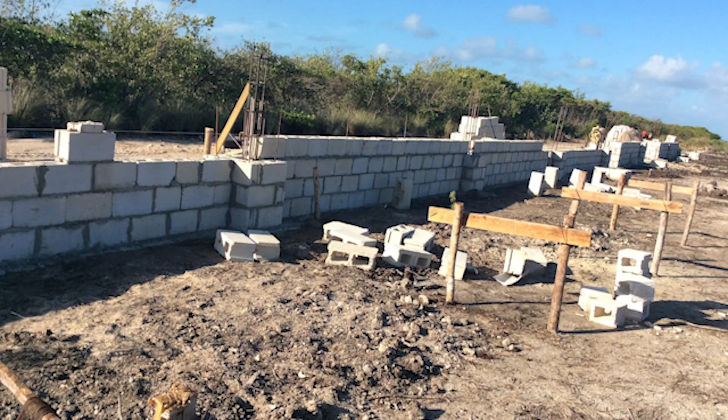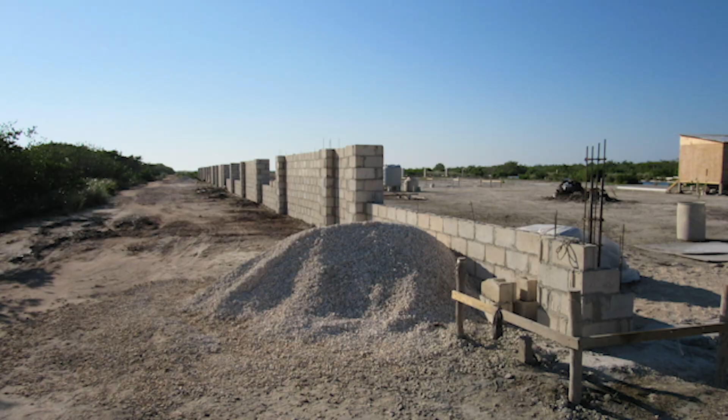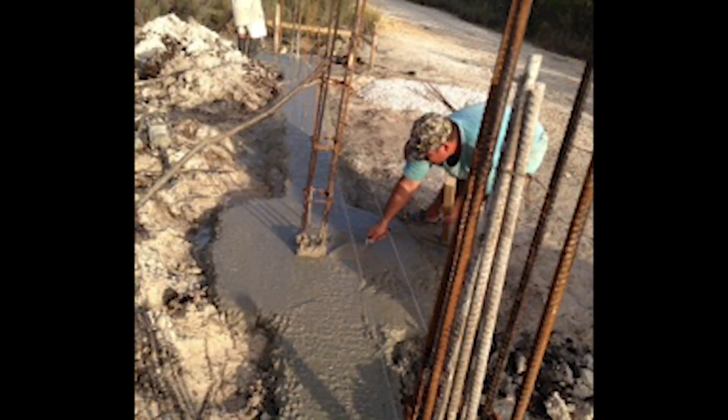Phase one. We kind of divided it up into phases. Phase one was, let's go ahead and find a piece of property, secure that piece of property, put a fence around it, really demark it from the rest of the community so it was secure and everybody was aware. We got it surveyed, planted stakes in the ground, and then immediately worked to get a contractor so we could start the fence and really start to secure the property.

We chose Caye Caulker, which is also a very touristy island, but at a much smaller scale. There's roughly 1,500 people that live on Caye Caulker, so there's not a lot of natives and families and housing on the island. So you get a fair mix of regular residents and inhabitants and a fair amount of tourists. It seemed to fit what we were looking for.

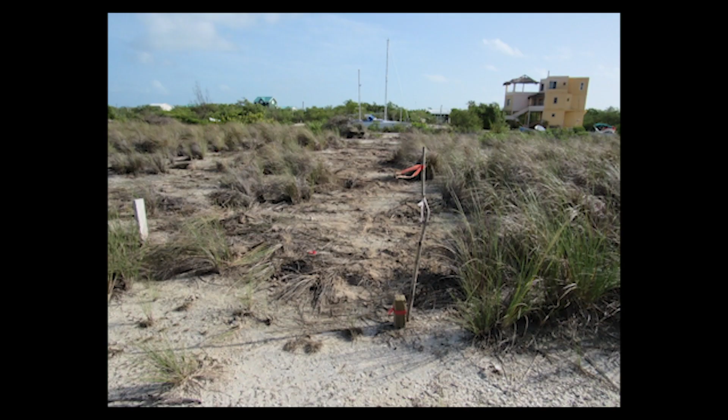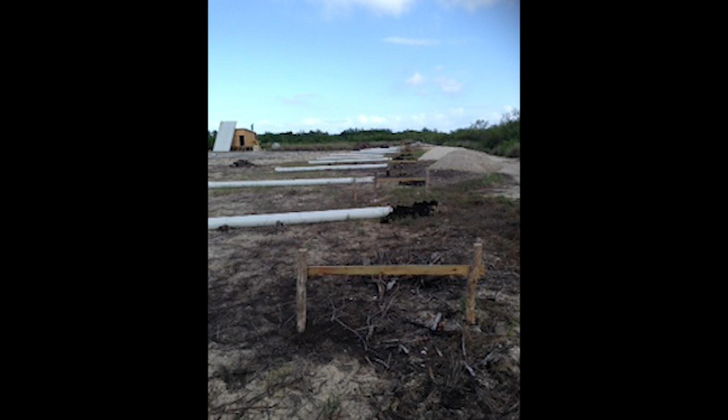Of course, the first step in the journey was to actually purchase a piece of land. But as you do it internationally, that opens up a whole other can of worms and process we were not intimately familiar with. At the end, it very much resonated with what has to happen in the US. Just imagine 10 times longer.

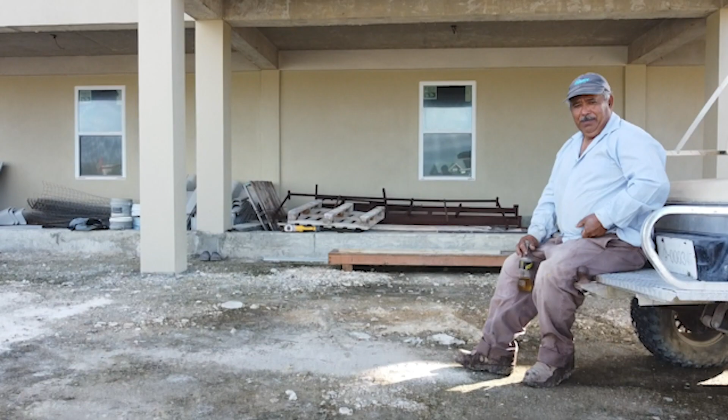So I got with our realtor. She was very instrumental in guiding us through the process. She introduced me to a builder who was local on the island. We went through, saw a bunch of his work. He toured me through the island of construction projects he had done, and that really put me at ease that he would be a good contractor.

After that, we had to figure out what we wanted to build. So we did a little bit of research online and tried to figure out what would blend in with Belizean style, a little bit of American style, but really give us a solid house that would weather well.

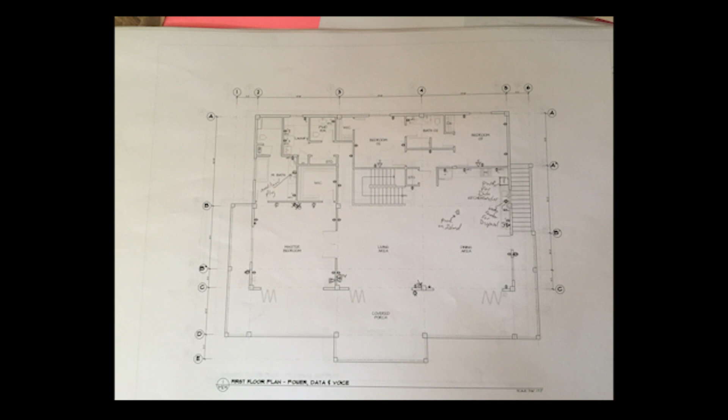So we picked out a design, and then we started to investigate what it takes to build in Belize. I went back to my realtor and my builder and said, hey, we've got a design of what we want for the house. Now I need to get an architect.

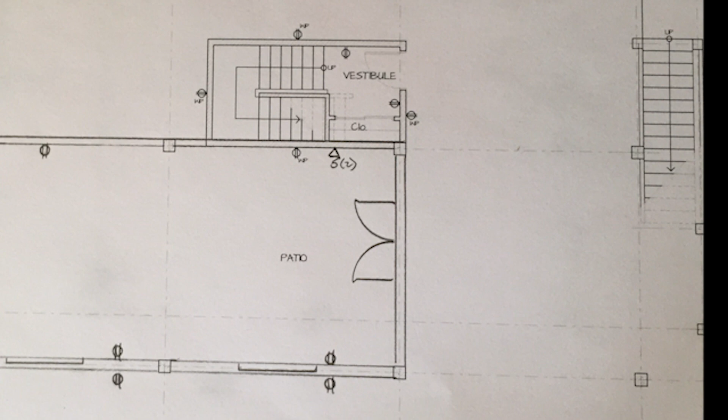So we made contact with the architect. I sent him the designs that we had, and he said, yep, absolutely, I can do the designs, I can do your drawings. My firm will pass it over to an engineering firm. You'll get the engineering stamp on it, you'll get all the approvals, and we'll take care of all the permitting process. Phase two.

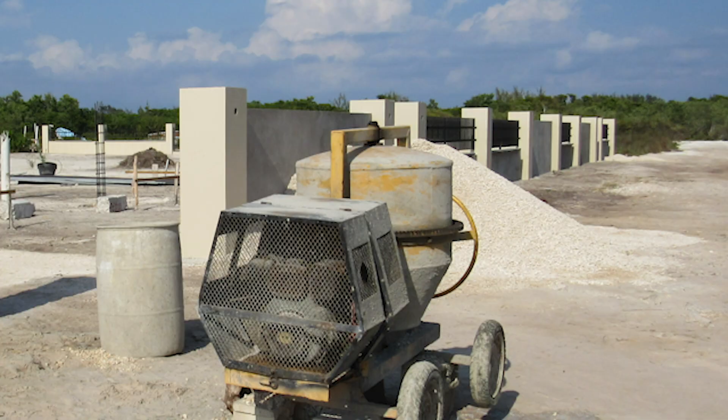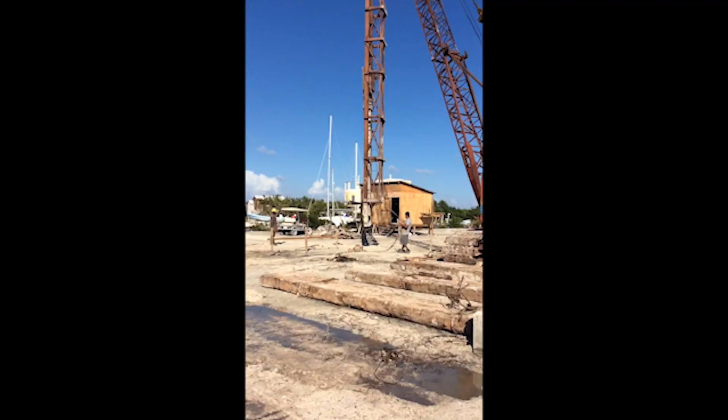During phase two, as we really started construction of the wall surrounding the property as well as the house, because they went hand in hand. As we had materials delivered for one, it made sense to deliver for the other, and as we had big equipment on site, whether putting in pilings or backhoes digging footings, it made sense to dig both house and securing fence.

Keep in mind it's an island, so everything has to be imported. We found we could source most things locally; it really came down to some of the finer finishing items we had to import. So I really became my own shipping company, because as construction started, I would send materials down, tools down, supplies for the workers.

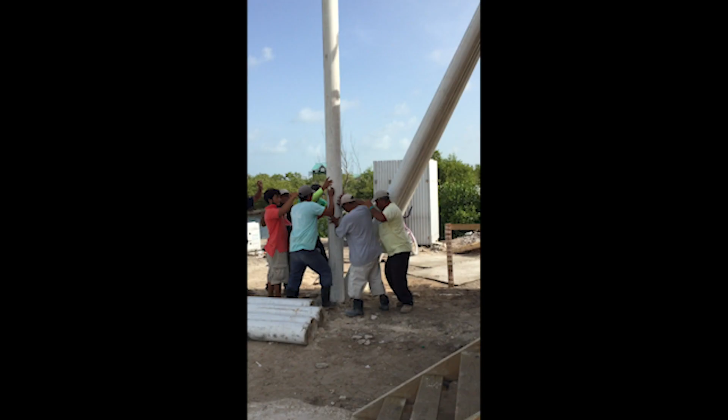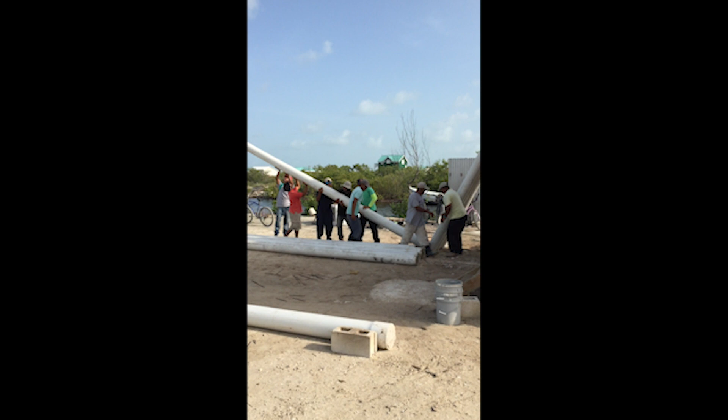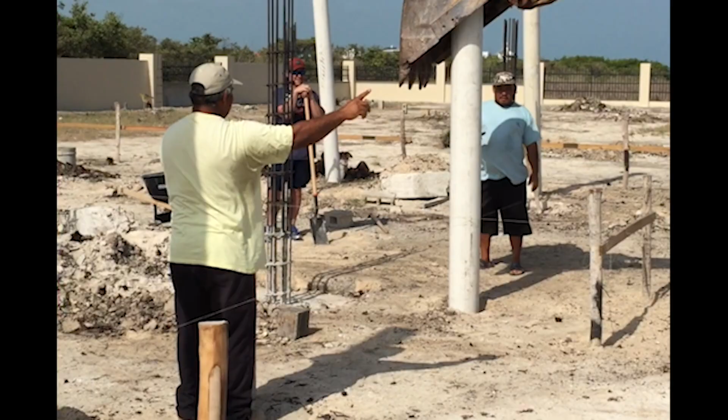It was interesting to watch them build, because here in the US we've got deep safety protocols, organizations like OSHA that make sure everything's safe and workers aren't at harm. Very different in a third world country. It was interesting, scary, but fun to watch them use local construction methods, building scaffolding and their own ladders out of 2x4s and bushwood or bush poles sourced locally from the forests.

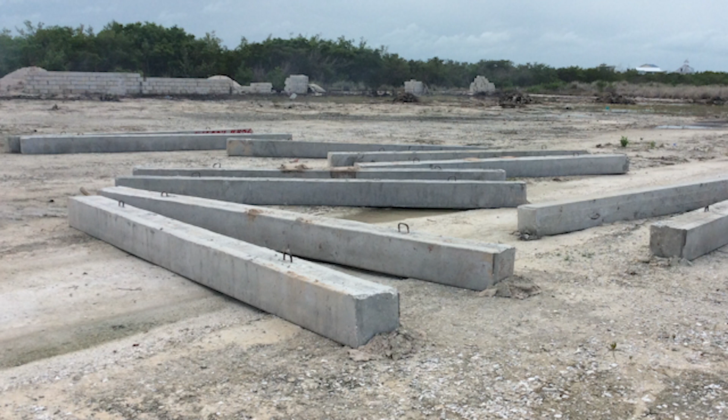To build a house on this island, we had to drive pilings down to bedrock. We ordered 1 foot by 1 foot concrete piles, about 20 feet long, and had a big crane come in and drive all of these down to bedrock.

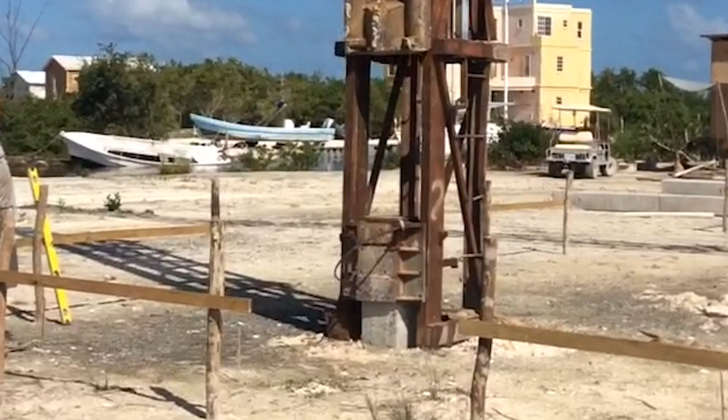Once the piles go in, we build the foundation around that, then take beams up from the piling all the way to the base of the roof line, so they carry the entire structure and weight all the way down to bedrock. This house is very heavy, so we needed something to support that weight, and driving concrete piles to bedrock gave us the stability needed to build a decent sized house that would weigh a tremendous amount.

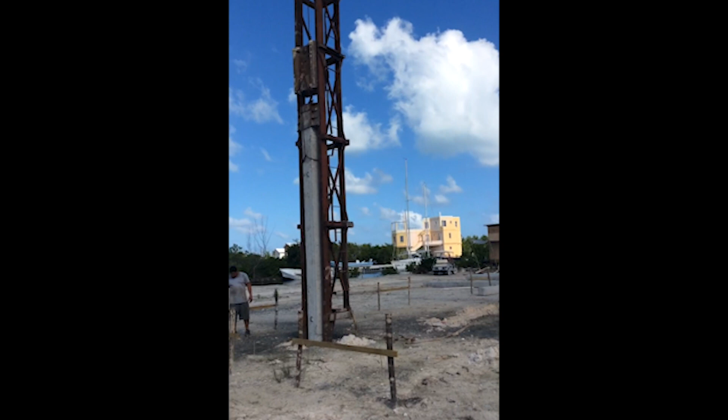Looking at the most interesting moments of building the house, a couple things stand out. Driving the piles in the ground was very cool, because as the crane lined them up, and I'd guess these piles weigh 1.5 to 2 tons apiece since they're 20 feet long, 12 inch by 12 inch solid concrete, the moment they released them, before they even started hammering, they'd drop like 10 feet down through the silty sand soil, then drive it the next few feet.

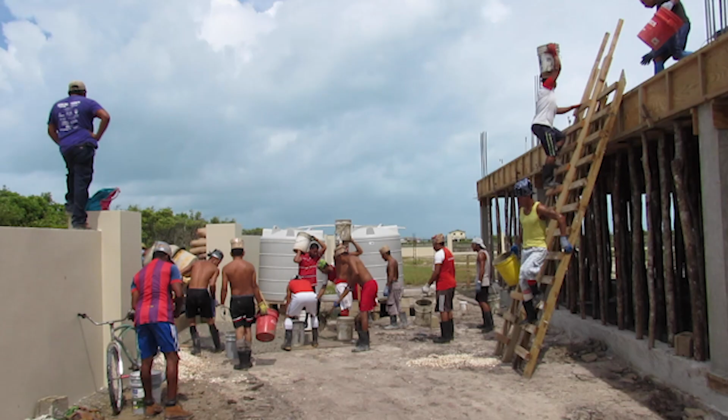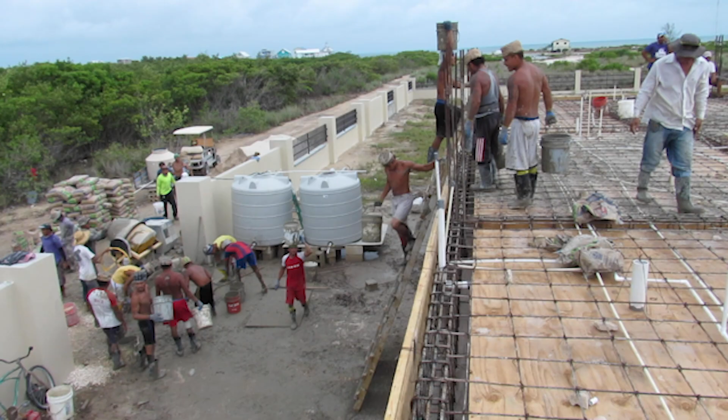The other thing was watching 40 men show up to carry buckets of concrete on their heads for these massive pours. Whether it was the floor, major beam structure, or the roof, workers came out 3 different times to do these concrete pours. So I like to tell my friends that 3 different times during those couple years, I was by far the largest employer on the island, since no one else employs more than 5 to 10 people.

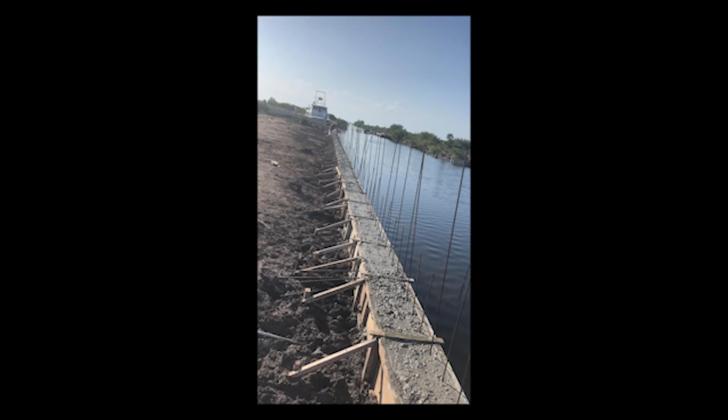Phase 3. As we wrapped up construction of the house, our long-term goal was to start developing the rest of the land. We bought 3 half-acre lots, so we have 1.5 acres that the house sits on. Because those 3 lots sit on a canal, we wanted to put in a seawall.

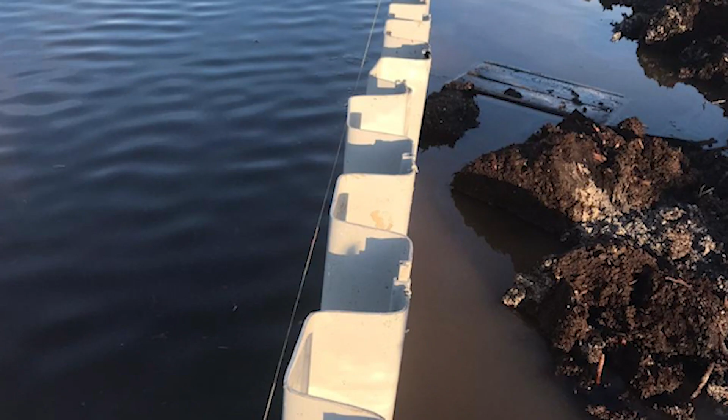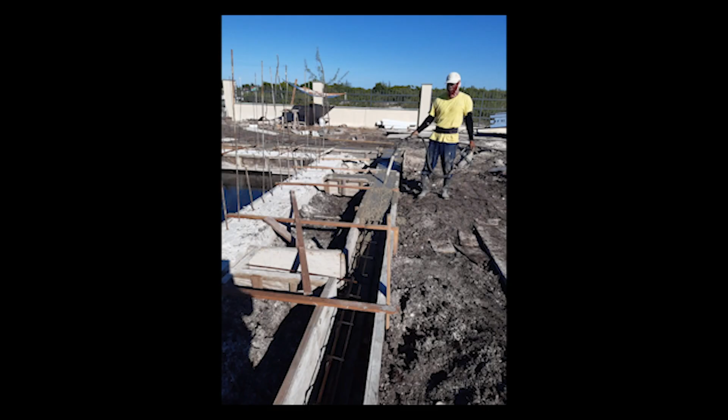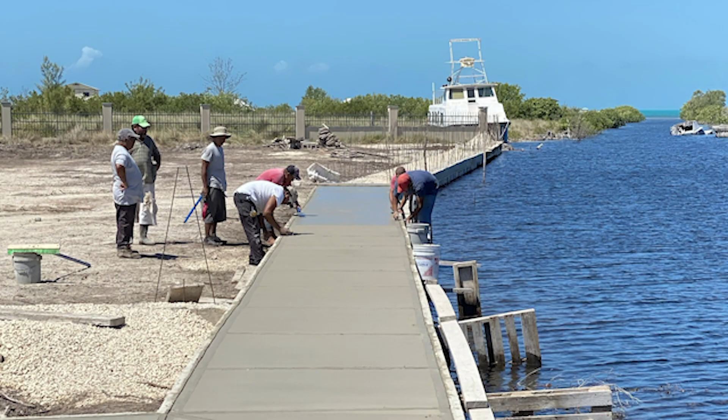To build the seawall, we had to ship down vinyl sheet piling—2 feet wide, 20 feet long. We had to ship down roughly 200 sheet piles that all had to be driven down to bedrock, then they pour the concrete cap on top once they are all driven down, cut, leveled, reinforced, and ready for the sidewalk.

We wanted to put something that would form a permanent barrier on the edge of that canal to keep erosion off, to provide a nice finish to that side of the property.

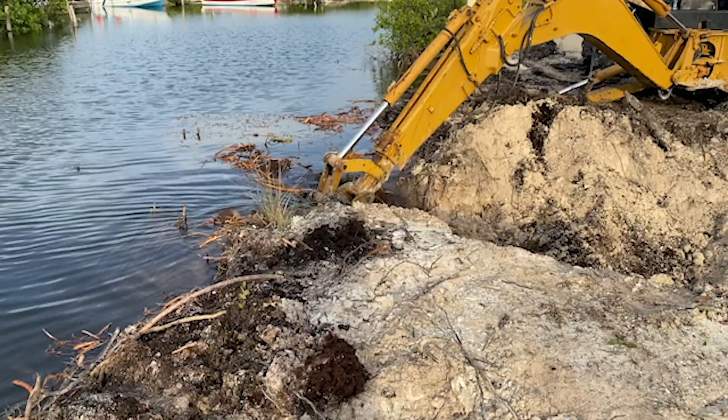As part of the construction process of the seawall, we wanted to put in a boat niche—a little harbor where we could park boats and jet skis, and have a convenient place to jump on a kayak or paddle board, finished with nice concrete and a sidewalk across the top.

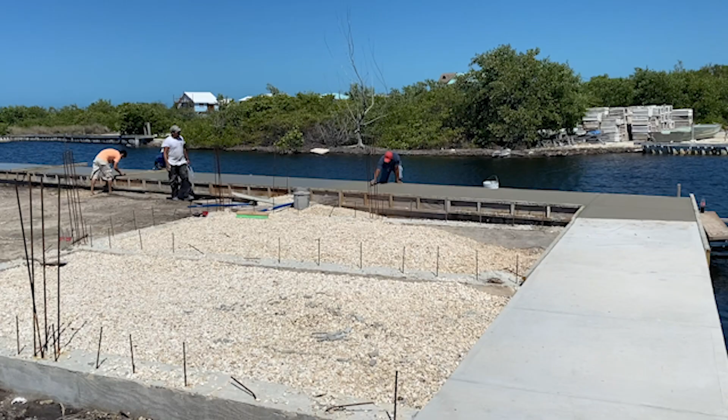That took about 6 months to complete, but made a very, very nice finished product, and really gave us the jumping off point to start on the landscaping of the lot, as it defined the last boundary.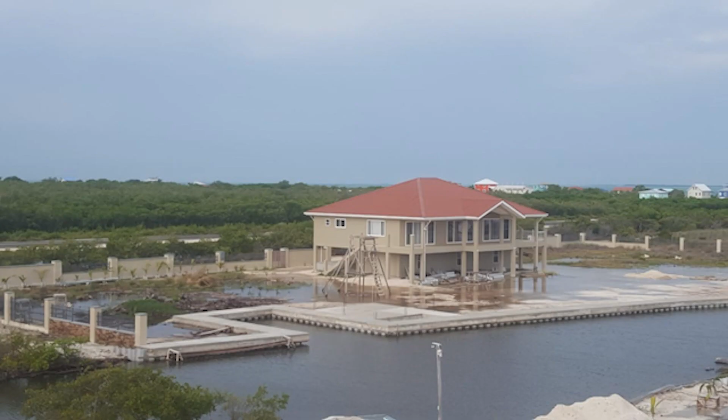Phase 4, the last main structure for the house and property that we wanted was a swimming pool. Being on the island is a little challenging because sea level is only about a foot below this property, and anytime you're that close to the canal, the ocean, it puts the water table right at about sea level. So as we started looking at what kind of design would work, we really had to balance what we wanted with what they can build in Belize.

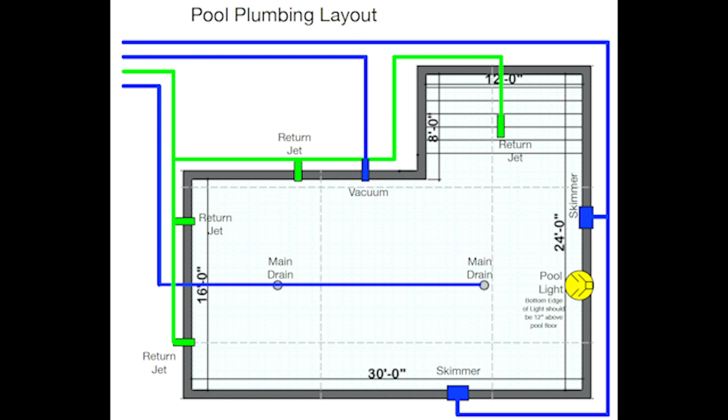We chose an L-shaped pool, very standard rectangular design. We balanced what we wanted with what was in the scope and capacity of our builders' talents, and then started the construction process on that.

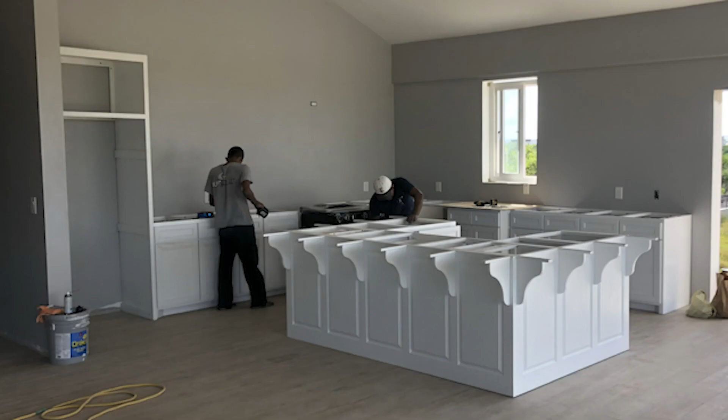Questions that I get all the time: How did it go? How long did it take? Were you happy with the outcome? I'm very, very happy with the way it turned out.

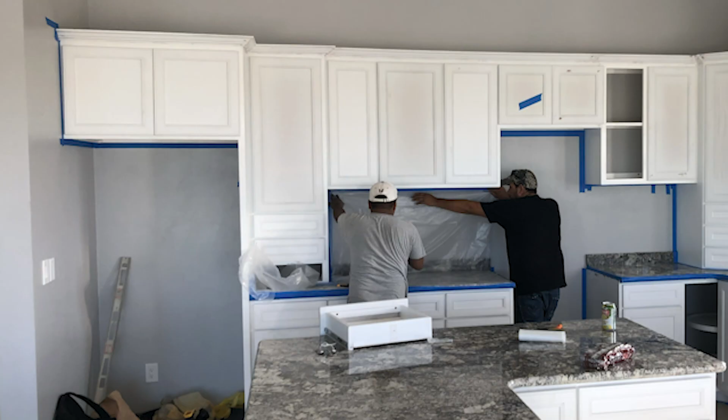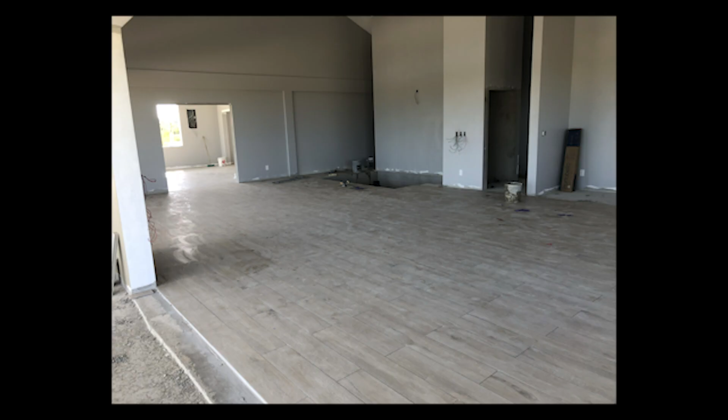It came out exactly like we wanted, but I think the reason it did is because we were there every step of the way. Anytime you're building a project, a house, or even a remodel, there's a million questions that come up—you have to be there to answer those. We also talk every week; he sends me pictures every week as he's working, and we talk through logistics. That's what's made this successful.

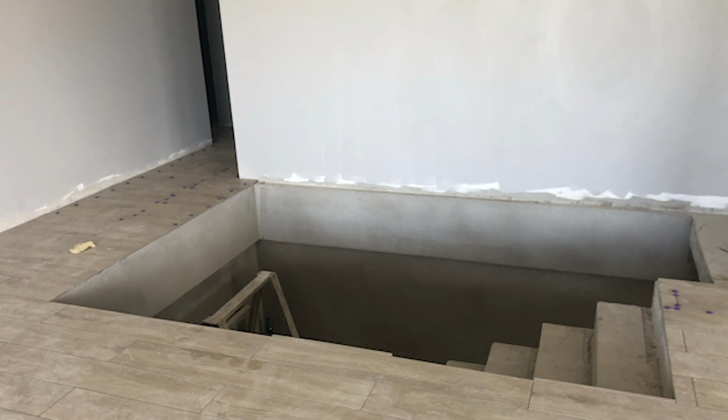It's not a quick thing to do. We are 5 years into this process, and we started out with a 5-year plan. So I'm very comfortable with the fact that 5 years in, we're just now finishing up, because it really tied in with what our original timeline was.

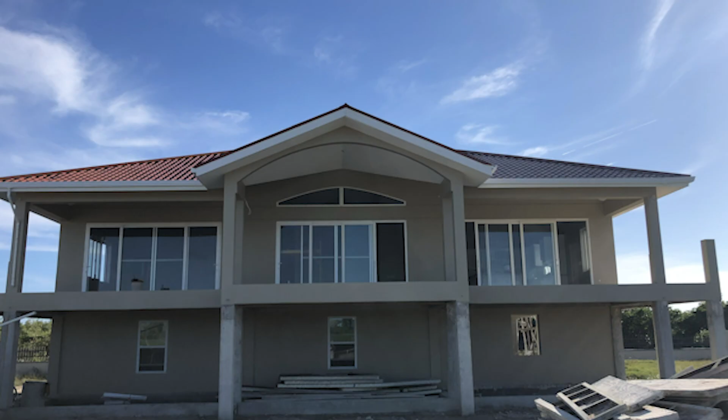A lot of people ask me, would you do it again? And my answer is, in a heartbeat. It's been a very positive project. The results are exactly what we wanted. We've had a great time—we've had friends down there, we've had the kids down there, we've shipped jet skis down there, we've played in the water, we've played in the sun.

My friends always ask me, what's next? I'm very project oriented—I seem to always have to have a bunch of irons in the fire. So they're always asking, is there more to do in Belize? What are you going to do next? I am going to take a little bit of a break after we get the pool done.

Down the road, we did buy 1.5 acres—3 separate lots—so that we could potentially build another house or two on either side of the big house that we built. But we'll have to see. That's a future dream; there's no hurry to get that done.

Really, the next step is to just go and enjoy the house, the pool, the seawall. We spent a lot of time, a lot of money to build this, and now it's time to go enjoy and really put to good use the investment that we made.